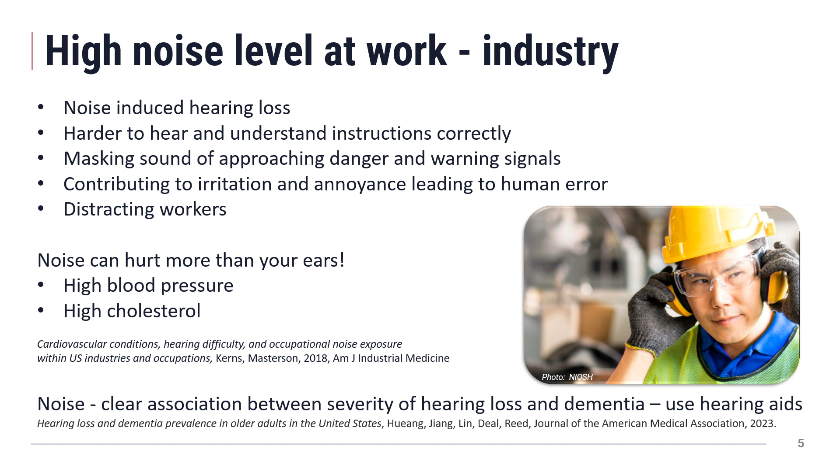I'm starting here with the industry, where you can actually get hearing loss because of noise. But that's not the only problem. If you don't understand the instructions, accidents can happen. You don't get the warning signals, and you get annoyed, and you make errors due to that.

But it's not only that it can hurt your ears—it can also give rise to high blood pressure and high cholesterol, and even more stuff.

There's a clear association between the severity of hearing loss and dementia. Many elderly people don't want to use hearing aids because they think they're not that old and can still hear. But studies show that if you have hearing loss, especially with other risk factors for dementia, you have more than 60% higher risk of developing dementia. By using hearing aids, you can reduce that risk. So you should take care of your ears, and if you have hearing loss, you should definitely use hearing aids.

I'll present information about high noise for workers, which is of course found in industry, but also in many other places like preschools, shops, etc. So it's not only in industry that you have problems with a lot of noise. In my field, when I come to an industry, we can help with performing the layout to reduce the risk of noise.

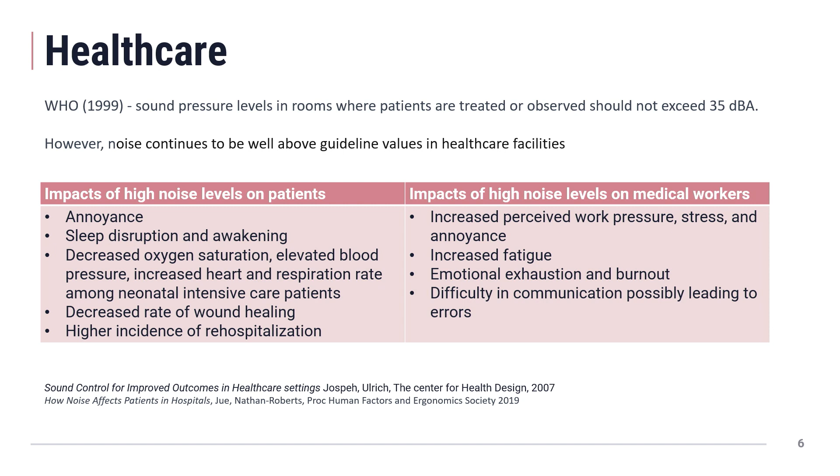In healthcare, noise can affect both patients and medical workers. Even though WHO has a guideline saying noise shouldn't exceed 35 decibels in rooms where patients are treated, the actual levels in those rooms are a lot higher, like 50 to 65 dBA. Noise levels in healthcare have increased over the last 40 years by about 15 decibels. This is not only annoying, it can disrupt sleep, affect the amount of medicine needed, and there's a correlation with higher incidence of rehospitalization if exposed to noise. For medical workers, it increases work pressure, stress, fatigue, and difficulty in communication. So in healthcare, there's a lot to do to decrease noise levels.

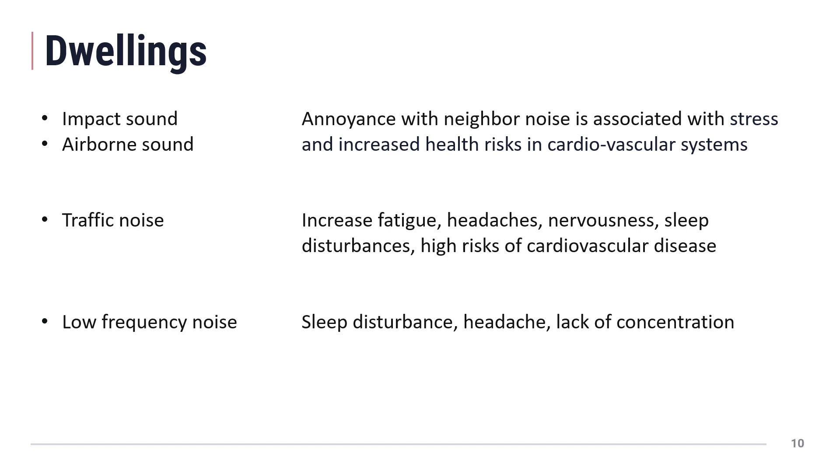So what is really important when you're designing new offices is that you take into account the need for individual working rooms, the need for quiet zones, depending of course on what you are doing in that office. But it's really crucial that you have the ability to have quiet zones and individual working rooms to make these kinds of offices work.

Yeah, dwellings. There's of course a lot of studies on dwellings. What I've read before is a lot of studies finding the right descriptor to correlate to what people think about the noise in a dwelling. In the last couple of years, I've seen new studies dealing not only with finding the right descriptor, but also finding how we are affected by noise in the dwellings.

Most complaints are on impact sound, and there have been shown to be some association between the annoyance with neighbors and stress and increased health risks in the cardiovascular systems. But I should say that these kinds of studies are quite few compared to, for example, the studies on traffic noise. So there's a need for more research on that topic.

Traffic noise has been studied more frequently, and it can be shown that if you are exposed to a lot of traffic noise, you increase fatigue, get headaches, nervousness, sleep disturbances, and you have a high risk of cardiovascular disease, etc.

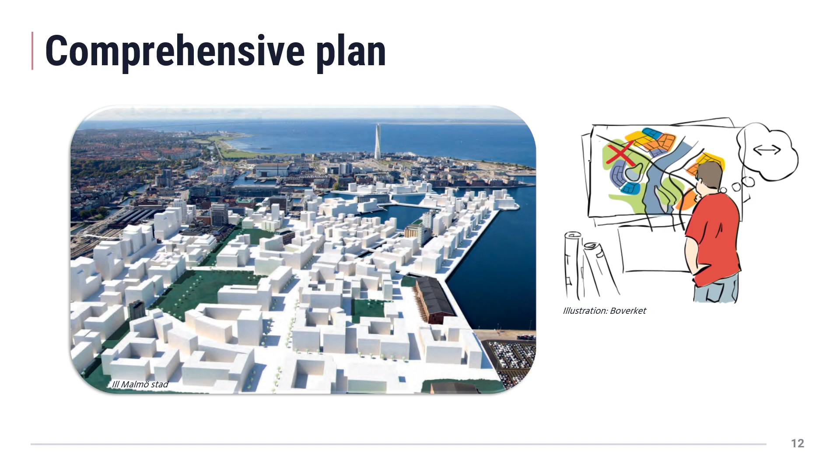Then we go to the detail plan, looking more into detail. Then you go to the building permit, when you are actually just looking at one house. Construct it, supervision, and then throughout this process you set visions, follow it up, and create new strategies to improve the planning process.

So in this comprehensive plan - this is a picture from Malmö, where there are plans to develop the area close to the sea, called Nyhamnen - they have just released its comprehensive plan for that area. In this area, there's a lot of noise from traffic, from the industries, and the harbor, and the harbor puts really a lot of restraint on this area.

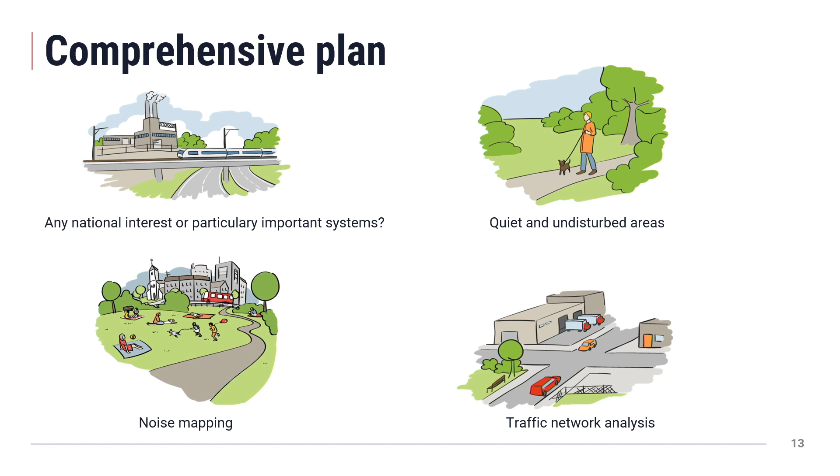So during that time, they're looking at which areas are suitable for which type of buildings and activities. They look at whether there are any national interests or particularly important systems that need to stay there that we need to deal with, and whether there are any quiet and undisturbed areas that we need to preserve.

They are doing some noise mapping to see what noises are there and how they can be affected if we start building new houses, and how we can plan the traffic network to make it sufficiently good. In this process, as acousticians, we're involved in all these different areas, making calculations and helping the planners find the best possible solution.

But of course, this is also collaboration with all other demands and criteria that society puts on this area. In the next phase, we go to the detailed development plan.

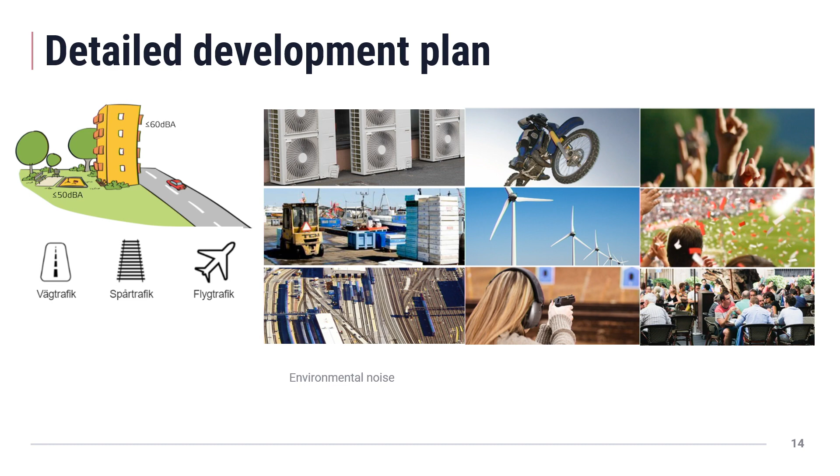That is when we divide this larger plan into several smaller detailed development plans. And there we do newer and more precise calculations on which levels we have at different areas, coming from the traffic noise and aircraft noise and from railway. But we also do calculations on any industrial noise, wind turbines, leisure halls, restaurants, etc., to get a better picture of how this area can be used.

Next phase. In this phase, you have a detailed plan. Now you want to build a house, and you need a building permit to start building the house. And in that phase, the focus is on the environmental noise, also noise from the streets and railway, aircraft, and industries. And we do the calculations even more precise.

This is a building. Here you have the roads, and those all dots represent levels at different points. We look at the planning, the plan of the house, and make sure that those restrictions that are set in the detailed plan is fulfilled.

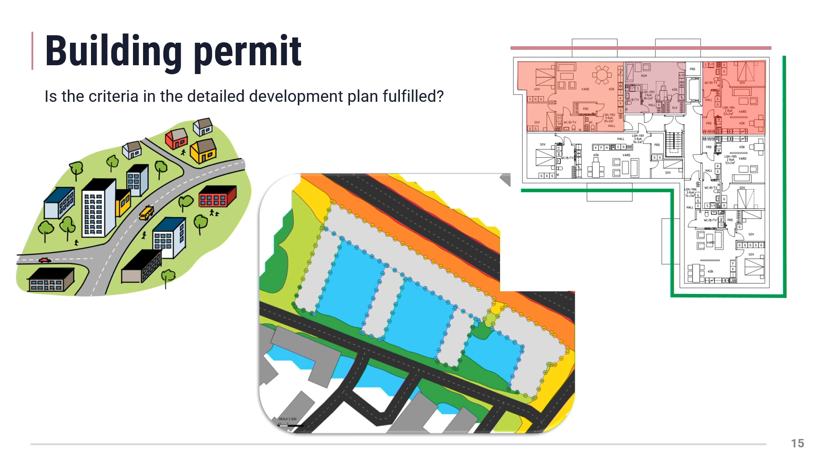And in Sweden, if the level of traffic noise is too high compared with what the legislation says, you want to make the apartment... you make sure that the apartments have a more silent side, and we do this calculation to make sure that all the requirements are met.

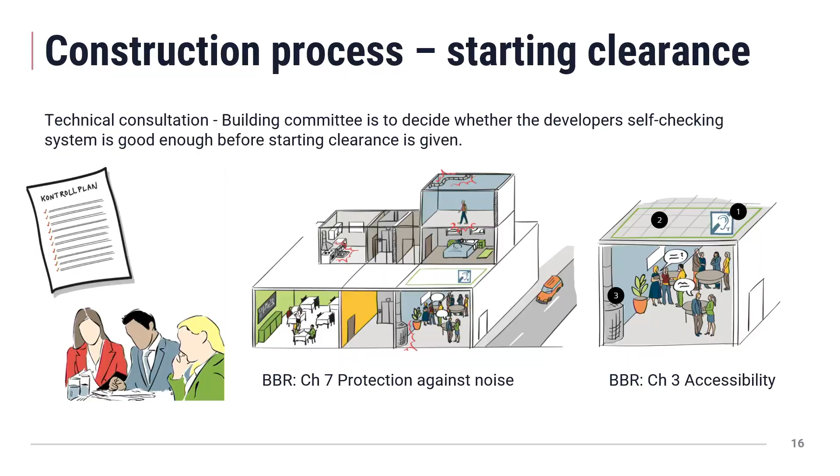And in the next phase, before they are allowed to actually build the house, you need to have a starting clearance. And this is where we, as an acoustician, actually design the house, design how thick the walls and the slabs are, make sure that noise from installations will fulfill the criteria.

If you're working in a public environment, there are some restrictions on the accessibility that puts demand on the reverberation time of the room. And more or less, we are making some kind of documentation of noise that is given into the authorities.

And when we're doing that design, we rely a lot on those criteria that are given by different authorities in Sweden. We have the Arbetsmiljöverket, sets demand on the working environment. Boverket, who sets demand within the house, how good insulation is needed between two apartments, for example.

How much noise is allowed from building services? How much noise is allowed within the house from traffic? Folkhälsomyndigheten is a supervisory authority. So whenever someone complains about the noise in a house, they put the restrictions on how much noise is actually allowed.

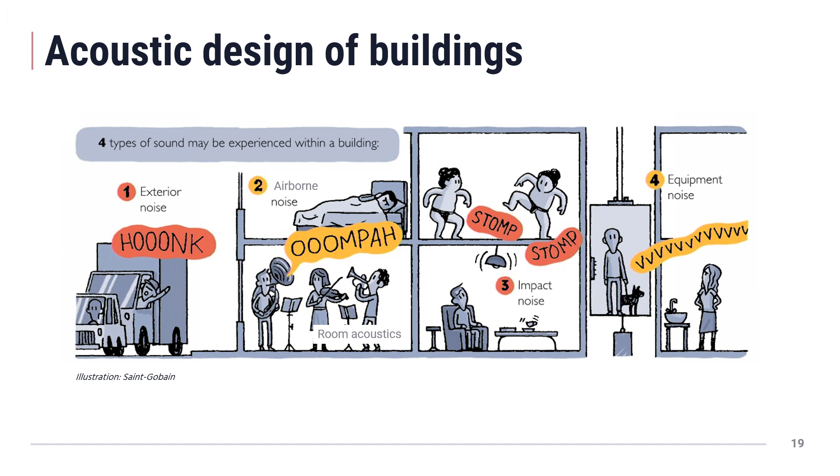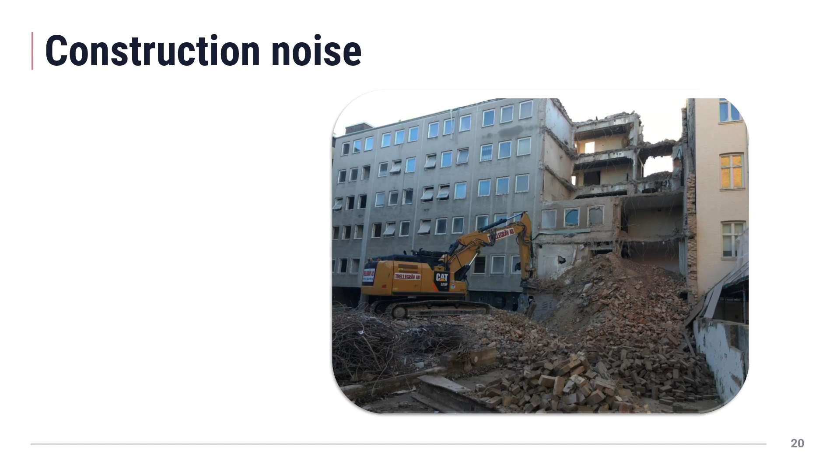So when you're dealing with the acoustic design of the buildings, you have those regulations, and we work with the exterior noise, the airborne noise, impact noise, that is when someone is walking above or beside your apartment. You're dealing with the room acoustics and equipment noise.

You're also making sure that during the process of the building, the construction noise must be taken care of.

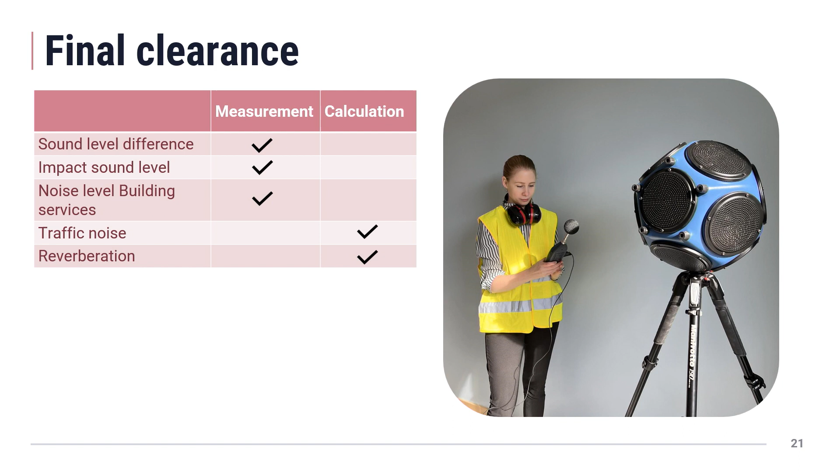And I think, to be honest, in many projects, those limits that the authority sets, they're quite often too high in practice. But serious builders try to find the best way of, for example, tearing a building down without disturbing the neighbors too much.

And as an acoustics consultant, we are also involved whenever there are complaints. For example, complaints that my neighbor has recently changed the flooring of their kitchen, and now I can hear them very clearly when they're walking in the kitchen. And then we go there, we do some measurements, and tell them what to do to actually fix it.

Or a very common complaint is where you have a restaurant or a music hall, and you have neighbors on top of that. It's quite often you have complaints on that. The last 10 years, the complaints on gyms, the noise from gyms into dwellings, has also increased.

But I thought I should speak a little bit more on how I worked on a specific project, and that is Forum Medicum in Lund, which I think those of you here in the room know which building it is. It's just close to where we are now. It was finished this summer. I started working on it about 5 years ago.

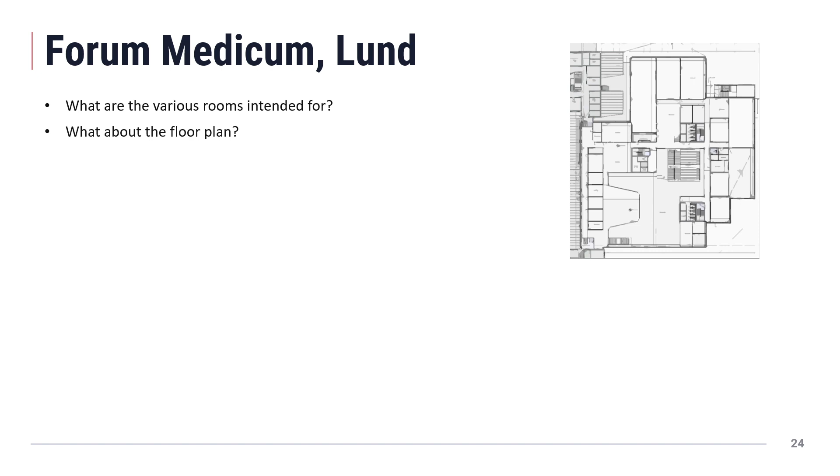In which areas is it critical for you not to be disturbed by what is going on in the next room? Are there any rooms that actually need some confidentiality? Various questions were asked and written down.

And then I had a look at the floor plan to make sure you haven't put a noisy room next to a room where you really need silence. So then you switch the location of different rooms to make sure it's optimized for sound.

You also need to be aware of other criteria affecting the acoustic design. For example, accessibility, which sets demands on the doors and the threshold beneath the door, because to make it accessible you'd like to just go into the room without any disturbance on the floor. But for sound, it's absolutely easier to reach the target if you have something that doesn't transport the noise.

Sometimes daylight is also a problem, because to reach the daylight criteria you want large glass partitions. But for sound, large glass partitions are not as good sound insulators as an ordinary wall, and they also reflect sound very much, so you can have problems getting good speech intelligibility.

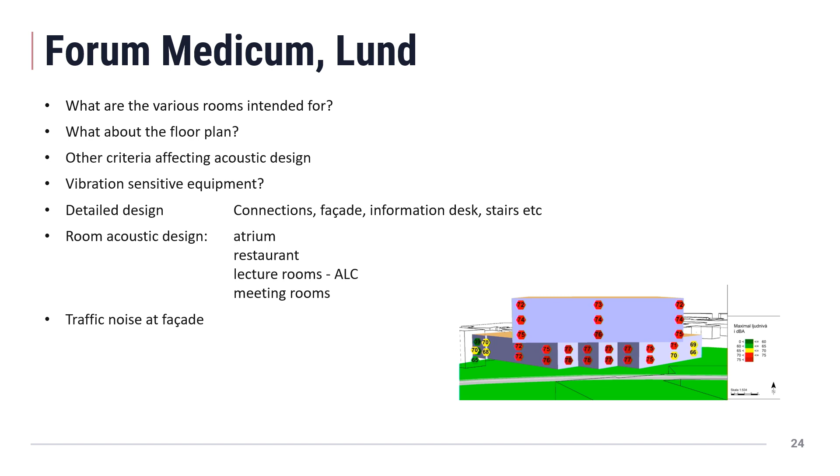We had discussions, several meetings on how to design these active learning classes, because there was a lot of different criteria that needed to be fulfilled to make them work. And also we studied the meeting rooms, and especially the acoustic design, the room acoustic design, to make them work.

As in every project, we calculated the traffic noise at the facade to make sure that the facade is giving good enough isolation.

We checked out the external noise to make sure that everything that comes from the ventilation system, for example, doesn't cause disturbances for the neighbors.

We also made some noise measurements before the construction started, because there are buildings next to it, and they can cause disturbances. So we made some measurements to try to plan the work so that the influence of the noise could be decreased.

By this one example Forum Medicum, I hope I have given you a short but brief view on how you can work with acoustics, being an acoustic consultant.

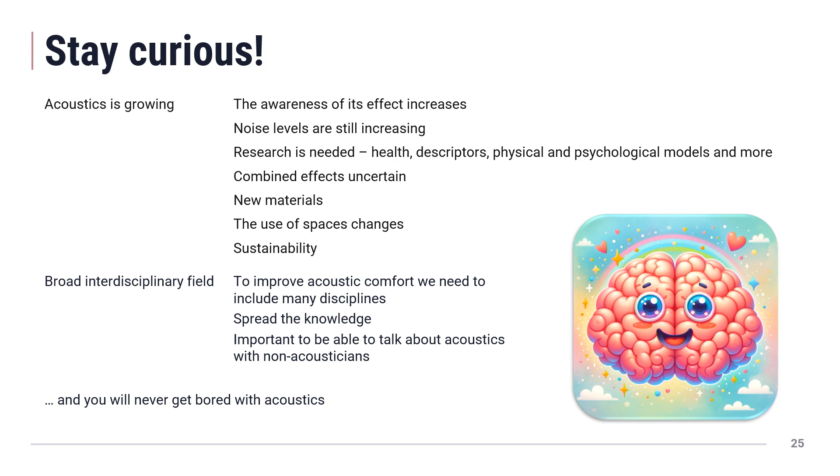Because what I hear when I'm speaking with non-acousticians, they say, okay, acoustics is so hard, I don't get anything. So that is something that we acousticians need to be aware of, how to talk about acoustics in a way that people understand.

And, as I said, you will never get bored with acoustics. It's always some new things. So by that, I say thank you.